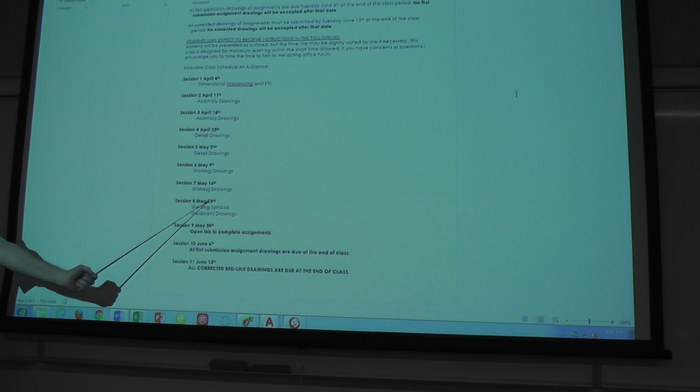We are now here. Session 8, week 8, May 23rd. I'm going to talk about welding symbols and weldment drawings. I'm going to have you do 2 weldment drawings. Chances are you won't get into weldments unless you're in a welding environment.

And basically, we drafters know just enough about welding and symbols and symbology to be dangerous. And the welding people go, drafters don't know anything about welding, which is probably true, unless you've actually done welding. And we do the best we can with the symbols.

Please stop printing, because it's going on tape.

So unless you're in the field, we can basically put a couple welding symbols on there, and a welding person is going to know how they're going to weld anyway. But you need to know at least a little bit about welding symbols, because you never know what's going to turn up in an interview session.

They might ask you, well, have you ever done any kind of welding symbols? And at least you can say yes. You don't have to say not very much, but you can say yes. And you've been exposed to it.

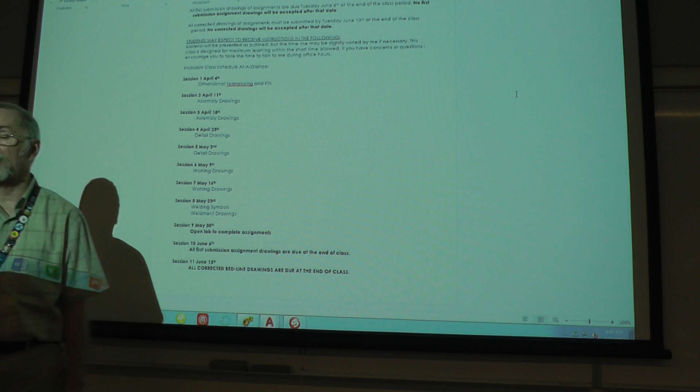Then, next Tuesday is an open lab to complete assignments. You have been given back some red line drawings for trolley assembly and belt tightener, a couple of you. The Tuesday after that, June the 6th, any and all first submission assignment drawings are due at the end of class. So that incorporates some of you, not all of you.

And then the Tuesday after that, June 13th, all corrected red line drawings are due at the end of class. That is it. No drawings will be accepted after that point. Which means you have 4 class sessions or 4 weeks to get everything done. If you get it done before then, you don't have to show up on June 13th. You might not even have to show up on June 6th if you get all your work done. Otherwise, some of you will be keeping me company while I correct drawings.

All right? Questions? Everything's well with the world? Good.

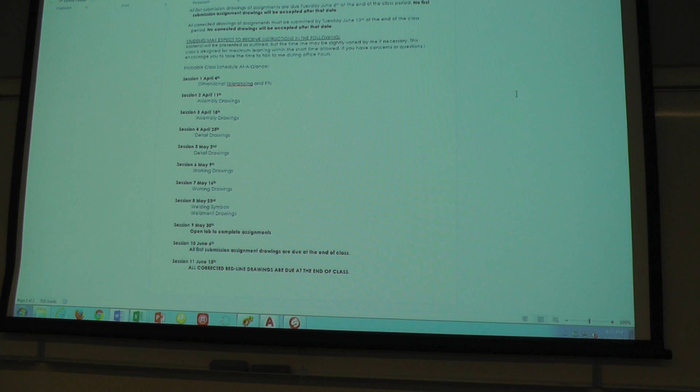All right. In your textbook, which we have not touched much, we've done a couple of the working drawing projects out of there. In the appendix is, let's see, page 673, 674, 675, which is kind of sum and total of the textbook.

Oh, that's good. That's perfectly clear, right? Everybody needs to go to the eye doctor. That wouldn't be as clear. They'll probably bring in a new projector next year after I'm done. And it'll probably be crystal clear, and after all of you are done. That's just the way it works sometimes.

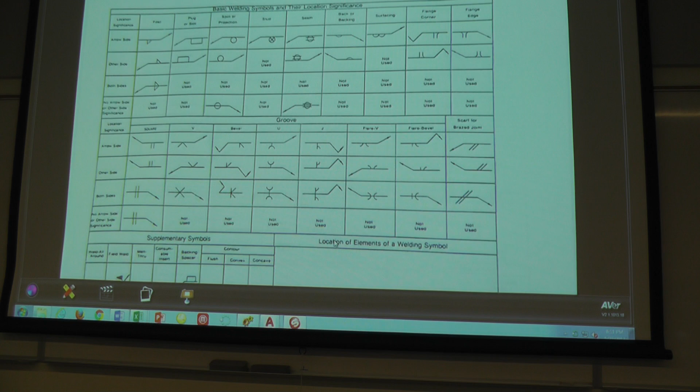There's some basic welding symbols, and that's pretty much what we have to deal with in welding.

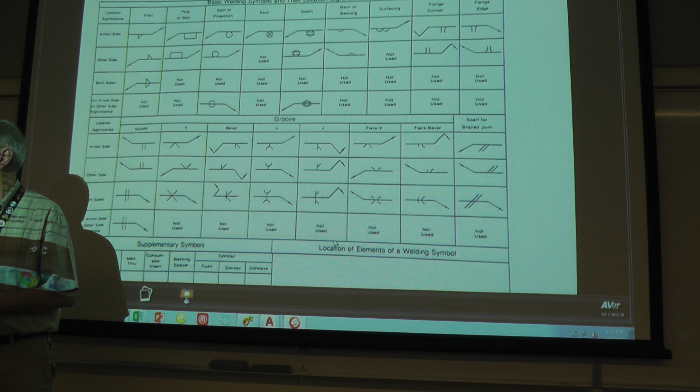If it needs to be accurate, it's welded and then it might be machined after that, or ground, or some other kind of processing is included in it. Just for welding's sake, we don't have to worry too much about that much accuracy in dimensioning. There's spot welds, which are done with a special type of machine. There's studs that are welded, seams, surfacing. There's grinding that can be done to make bevels, to make curves, to take away metal in the joint itself, which is then filled in with filler material.

And there are different types of processes for welding. Arc welding is one, and TIG and MIG and tungsten gas, and a lot of different kinds of processes. But again, if you get in and around that kind of an environment as a drafter, you're going to learn those things. And it's probably going to be a few symbols that are used over and over again. So that's why we're not doing a whole lot with weldment drawings. But there are symbols for square joints and V joints and bevel joints, U joints, J joints, flares, flare and bevels, surfacing, and those kinds of symbology.

The biggest thing about fillet welds is the fact that no matter if the arrow goes to the right or to the left, the orientation of the fillet is always the same. The straight perpendicular line goes up to the welding leader. It's always on the left side. And the angle goes up to the right, no matter what orientation the arrow's going. That's the biggest thing. What most drafters want to do in the classes I've had is flip this around and basically mirror image that if the arrow's pointing this direction, and that would be incorrect.

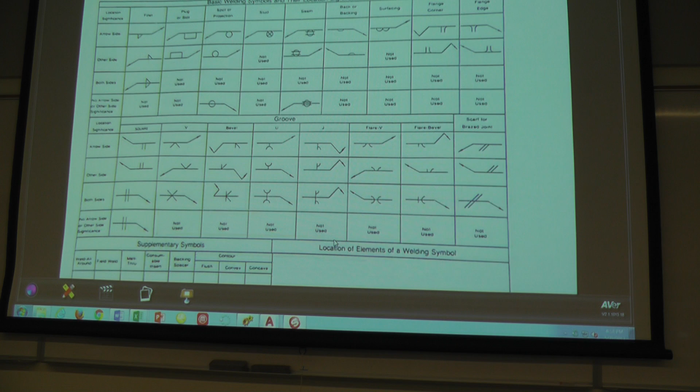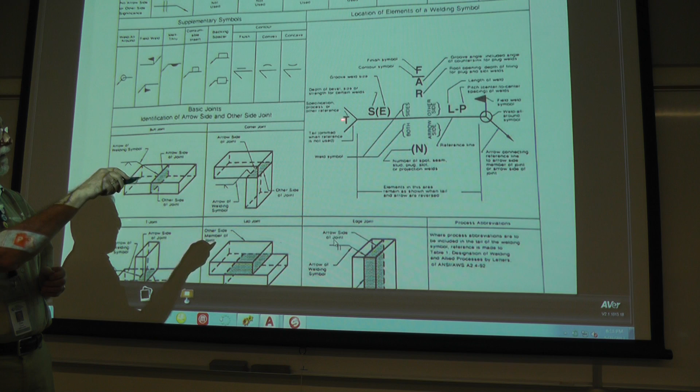If you get really extensive, let's see if I can sneak that in. There might be a lot of information that exists in a welding symbol. For most of the stuff that I've ever done, I've had this horizontal line and then the arrow that goes out here and points to the joint itself. And it might have a little tail on here. The tail can be used for something that says like 2 places or typical. TYP is an abbreviation for typical, which means that that particular weld and size of weld is going to exist pretty much on the entire drawing or at different other places.

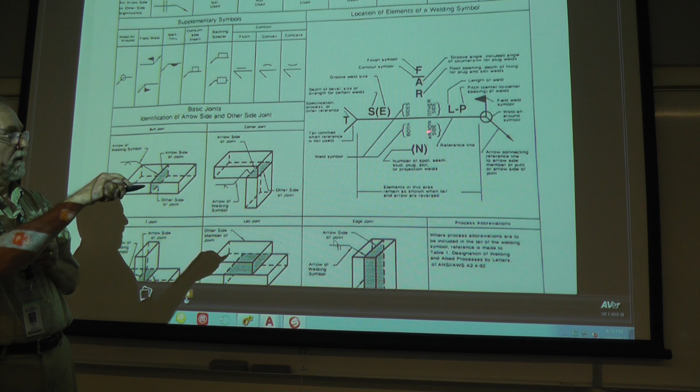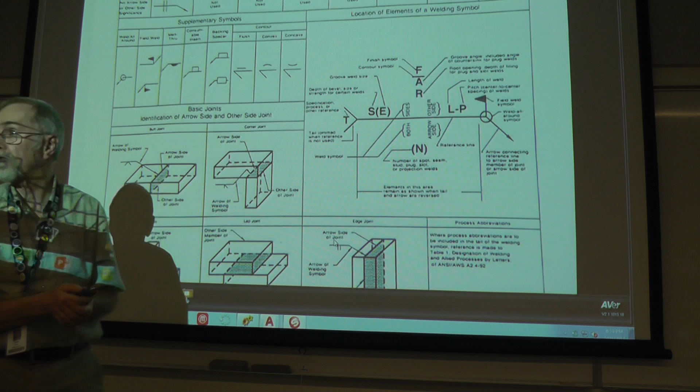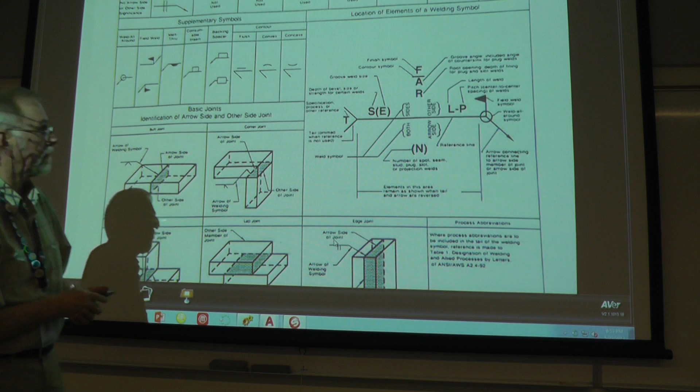You don't really need to worry too much about all this, other than the fact that when the arrow points to a joint and the welding symbol and size are below the horizontal line, that means the weld is applied to the side the arrow points to. It might be just that side, or there could be a joint on this side and another weld on the other side with another piece of metal positioned somewhere. If there's information above the line, that means it's applied to the side opposite the arrow. There's a number of other pieces of information here too. This could be a fillet weld joining those two pieces together.

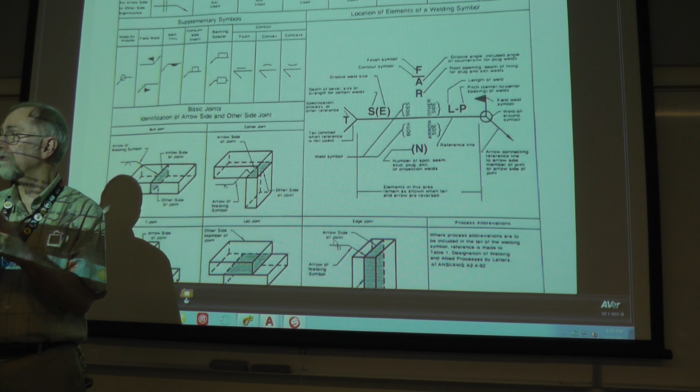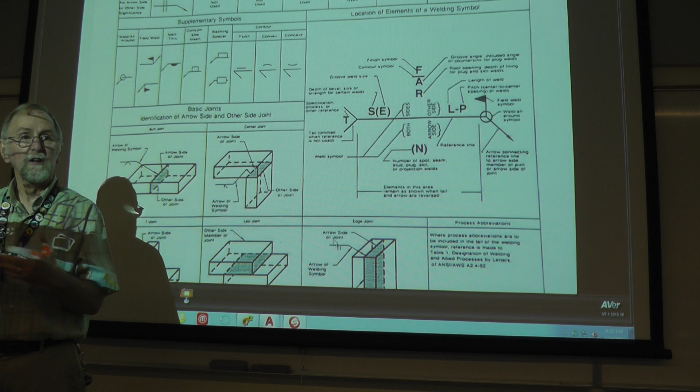I've got a worksheet for all of you to fill out, and we'll go through it together, showing different types of joints and different ways metal is welded together. If it's welded properly, when two pieces of metal joined together are going to fracture or fail, the weld itself should not fracture — it should be the metal on either side of the weld, because the weld heats up that metal, melts everything together, and fills the melted area with filler rod. Welds fail due to imperfections: not done properly, too hot, too cold, or the welder doesn't know what they're doing.

That's on that. If you look at the next page, there's a double fillet welding symbol. Again, the fillet weld is always oriented in this position: the vertical part to the left, the angled part to the right, and the weld size goes to the left no matter which direction the arrow points. The size of the weld is always here.

There might be a weld that is a specific length — it doesn't go the entire length of the joint for one reason or another. If that's the case, a length would be put in here. That's really pretty much all you as an entry-level drafter need to be concerned with. You might run into a welding job, and it's kind of like on-the-job training or learning, because it's a really specialized situation, so chances are you probably won't have to worry that much about it.

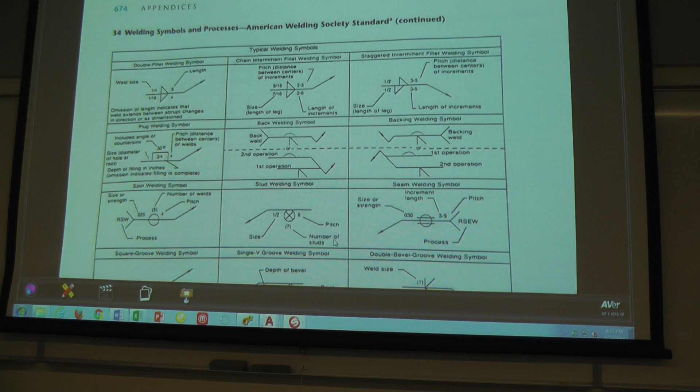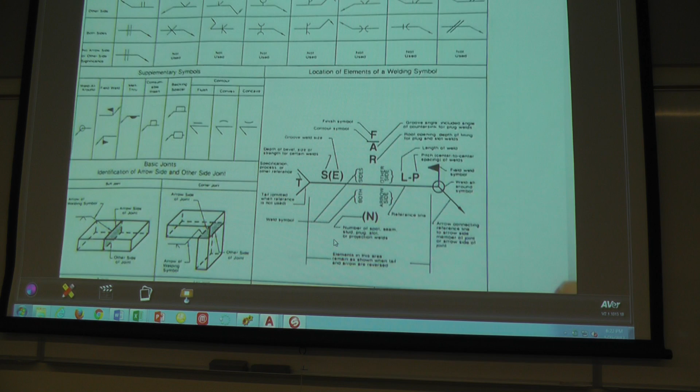Let me drop back to this. Another thing I've run across before is a weld symbol with a level horizontal line and the arrow going out, with a circle around it. That means there's going to be a weld that goes all the way around the particular joint, the pieces of metal being welded together.

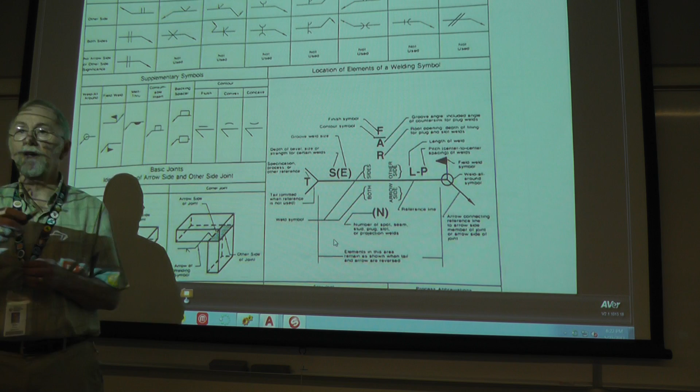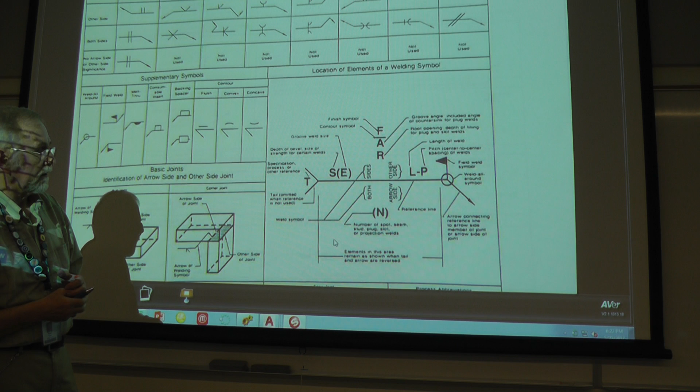A little flag like this that comes out, with a filled-in triangular shape, means that it's going to be welded out in the field as opposed to being welded in the shop. That's probably what you'll run into more than anything else when making a welding drawing.

On page 675 is a chart of all the different kinds of welding processes that exist. I've done a little welding in my lifetime, not much, and it's been years since I did any kind of welding, so I can't even begin to explain what all these processes are, and I'm not even going to try. But you can see there's quite a variety of things that go on in welding — different processes, different ways of welding.

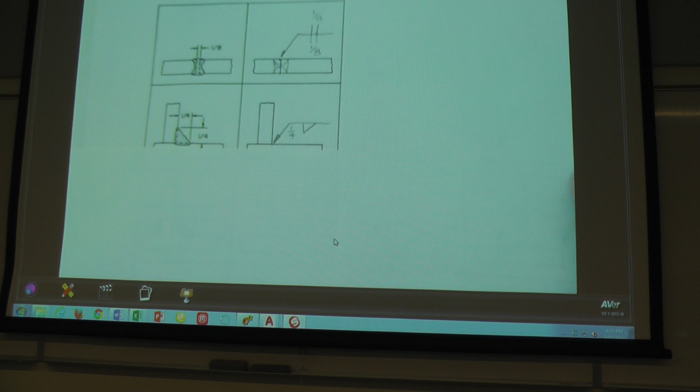All right, the top left. This is a butt weld. Generally the pieces start a little bit separated and held in place, and then the weld is applied. So the symbol for a straight, butted up together kind of joint would be this. You draw a leader out, a 45-degree angle or 60-degree angle possibly, and a horizontal line, and then two straight lines here and here. So you can see the illustration that it's going to be welded on this side, and it's going to be welded on this side.

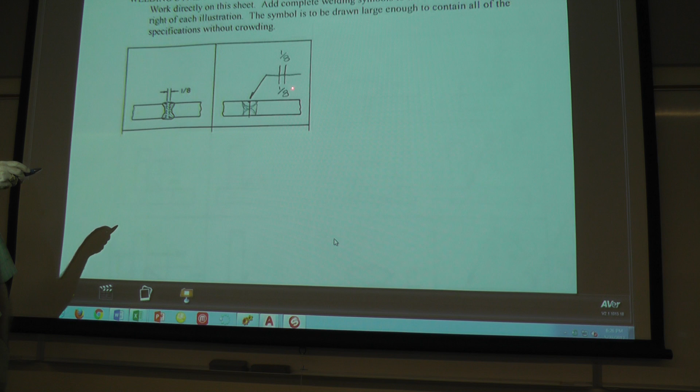So it's welded here, cooled off a little bit, flipped over, and welded on there. And the gap that is supposed to exist is 1/8 of an inch. Gap between the two pieces of metal. And then when this is welded and all filled in, it's like one piece of metal. Again, it's going to fracture out over here somewhere if it's all done properly. So the size, the gap, is put here. That's not the size of the weld. The weld would be determined by the welder. It would have to be by whatever thickness the metal is going to determine what the size of the weld is. And that's all I need. It's 1/8 of an inch here.

So this means that it's welded on the arrow side of the symbol, and this symbol and number that's up here means that it is welded on the opposite side of where the symbol is. And that's the meaning of those two, the significance of that.

So is the arrow like a full arrow, or is it just a half arrow? It should be a full arrowhead. Okay, just making sure. This is probably one I filled out in class, and I didn't want to fill it out again, so I'm just holding it out.

Fair enough. Should we write 1/8 above? 1/8. Yep, can be just like that. So again, the symbol on the side the arrow is pointing means it's an 1/8 inch gap on it. Yeah, that means there's an 1/8 inch gap, this means there's an 1/8 inch gap.

Well, if it's a butt weld, it's gonna be on both sides. Now, it might be that for some reason it's only welded up here. So the symbol means that this would be on this side of the welding symbol only. But if it's a butt weld, it would usually be welded on both sides. All right, let's slide over to the next one.

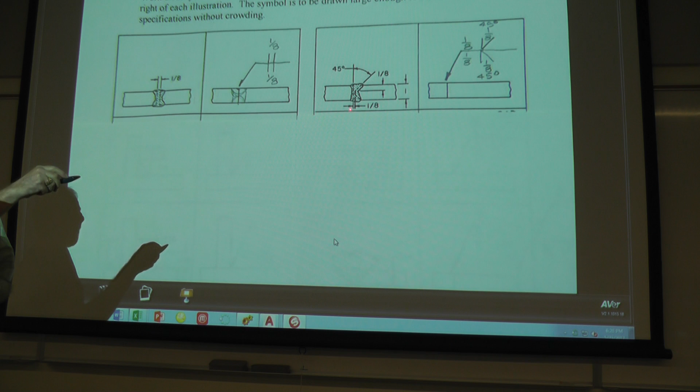This one is a straight piece right here, and then this piece and this piece have a 45-degree angle ground on them. It's one inch thick. The information is that this penetration needs to be 1/8 of an inch, and the 45-degree angle is gonna go down about 1/8 of an inch on both sides, which is 1/4. So there's quite a bit of material left here, and there's an 1/8 inch gap right in here and a 45-degree angle. So the symbol for that is gonna be, here's the size of the weld, penetrating down 1/8 of an inch on the arrow side and on the side over here. So that's been ground out.

This 1/8 of an inch is for the gap that exists. A 45-degree designation at the top. So gap of 1/8 an inch, 45-degree angle on the grinding of it, and 1/8 of an inch penetration on the weld itself. So if you add those numbers up, if it's one inch thick and it's 1/8 inch penetration and 1/8 inch penetration, it's not gonna go all the way through. Which would surprise me to some degree. But that's the information we have to work with, and that would be the welding symbol.

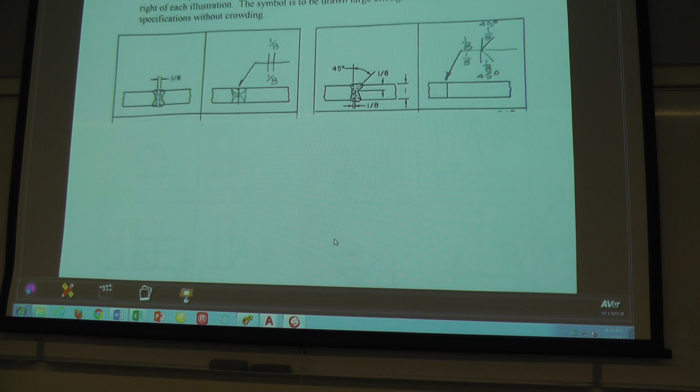Next one down is a fillet weld. Generally pieces that are at right angles to each other. This one says that it's gonna be a 1/4 inch weld and a 1/4 inch weld, so it's gonna be symmetrical. The only symbol that is necessary on that is to go here with a fillet weld. Notice the orientation, the vertical part to the left, this going up to the right, and the size of the weld is 1/4. What this means is that this weld is applied to this side of the symbol, which means it's only welded on this side of the two pieces. There's nothing over here on this side.

So is the idea that the flat side is facing towards where you're gonna weld, or is it the curved side? This side right here? No, that's just where the orientation is. It's not necessarily relating to how the weld looks.

The weld was on the other side, right there. If the weld thing was still going out this other way, the flat side would still be on the left side. It's always on the left side.

Gotcha, but they would be facing upward. Yeah, it would be facing upward. If it was on the other side, it'd be facing up? If it's on the other side, and since I don't need this ever again...

If this had a weld over here, that's what you're asking, right? The symbol would be this.

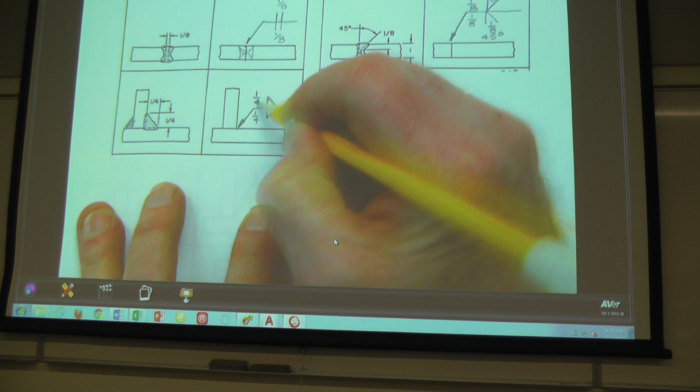Okay, so on top means on the left and on the bottom means on the right? No, on the bottom means it's on the arrow side of the symbol.

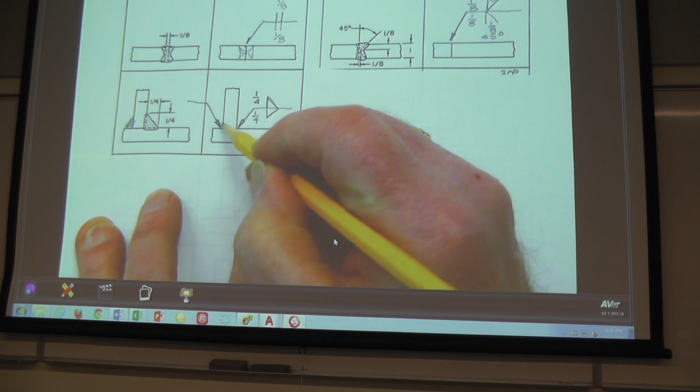Because I could put a welding symbol over here instead of over here, if I had enough space. So if I put a welding symbol here, and if it was welded on this side right here, then the symbol would look like this. And I'd put 1/4 of an inch in.

Okay, so you put it underneath if it's on the same side as the arrow. If it's on the opposite side of the arrow, you put it above. Correct. Okay, gotcha. All right, this one here is...

Has an angled ground on it of 30 degrees and a 1/2 inch fillet weld on this side. This weld goes in 3/4 of an inch, so that's the size of the weld.

So one welding symbol can be placed out here, and a line that goes - that's a horizontal line in case you didn't realize that. So the fillet weld is on this side, which means that the fillet weld is on the arrow side of the symbol, which is going to take into account this fillet weld right here.

And the size of it is 1/2 inch. On the opposite side over here, we're going to grind this out to kind of create a fillet in there, but the symbol is this, which means it's ground out at a 30-degree angle, and the penetration size of the weld is 3/4 of an inch, which means it's going to come in 3/4, 30-degree angle that's grounded.

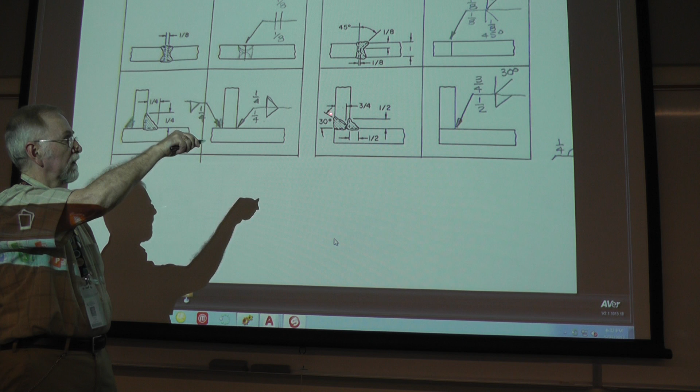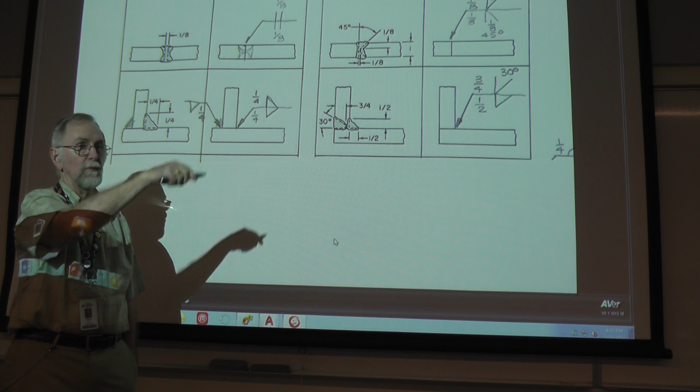So it's not a fillet weld because this is flat across here. But to get the penetration that's needed to make this strong enough for whatever the design is, we're going to grind out part of this. And again, it's ground in this direction, but the flat side of the welding symbols are always to the left. It has no relationship to pointing to the weld and orientation of what the weld is itself.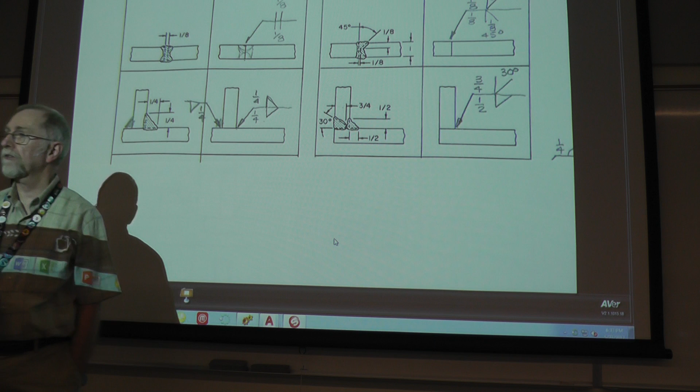To get off topic, but I've seen different versions of how the fraction is written, either at an angle. Which is preferable? Which do you prefer? Whatever's easiest to put in as text. Because it's mixed and matched on mine, but I didn't know if you had a preference or what.

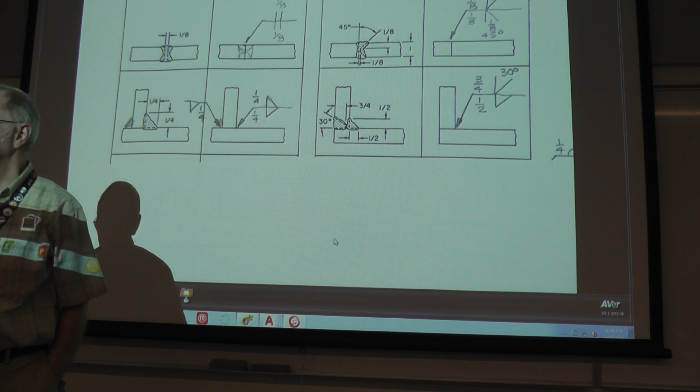No, it could go either way, quite frankly. It could go vertical like this, or it could be more not stacked. Again, welders aren't too particularly fussy about how the fractions show up. They just need that basic information.

All right, next one down has 2 fillet welds that happen to have some different sizes to it. This one is a fillet weld that's 1/4 inch. This one is a fillet weld that is going to be 3/8 of an inch in this direction horizontally and 1/4 of an inch in this direction vertically.

So again, I'm going to put out the symbol, horizontal line, fillet weld, flat side to the left, angled up at a 45-degree angle, 1/4 by 3/8 and 1/4 inch.

Brent, kind of to answer your question, I probably put them more vertical because of space limitation, more than anything else, because I was filling these out as we were going. This means that this weld is on the arrow side, 3/8 by 1/4, and on the opposite side, away from the arrow, is the 1/4 inch.

Nick? You know, if you've got the two different measurements, like the 1/4 by the 3/8, the first 1/4, does it mean specifically it's only going up 1/4, or can people flip flop that? I think, I'm not sure, to tell you the truth. You're gonna ask. Yeah, they seem particular. There might be a particular method in that, but I'm not aware of it, I guess at this point.

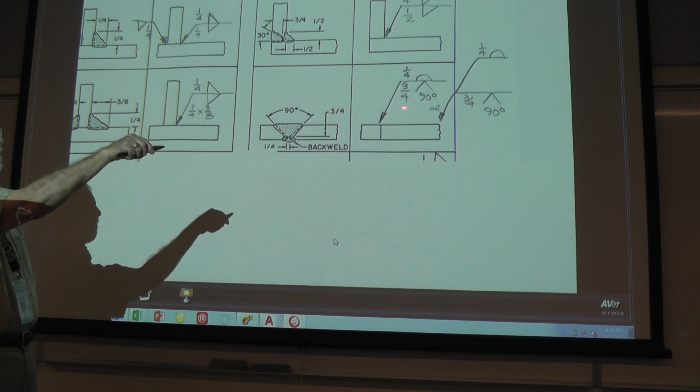So this is one way that I can do it. I can run the leader up and the horizontal line, and then this means that this information of the weld is applying to the arrow side of the welding symbol, the angle, that it's a V, and the size, which would be the penetration in here, 3/4 of an inch. And then this is a symbol, kind of like a little half circle up here for a backweld, and a 1/4 inch. It can be done in this manner, or as an alternative, it can be done looking something like this. Now, this arrowhead would be in this position right here, but I had to move it over, okay?

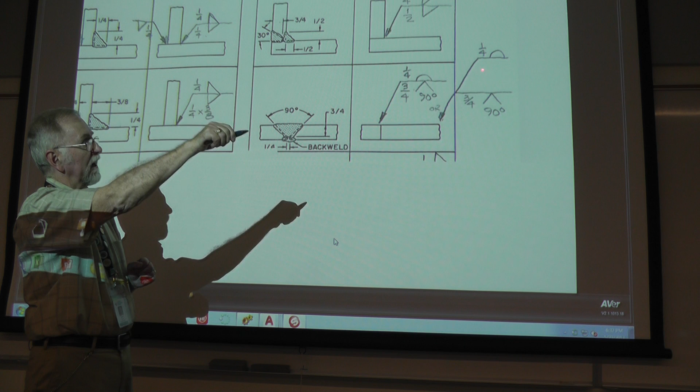So again, my angled, my ground out angled piece, 90 degrees and 3/4 of an inch. And then I could extend this on further, maybe not quite so high, maybe out in here somewhere, and put in then the backweld symbol, 1/4 inch, so it's above the horizontal line, which means that it is being applied to this side of the weld joint over here.

Any welders in here? Am I doing okay so far? Oh, good. Let me know if it's wrong.

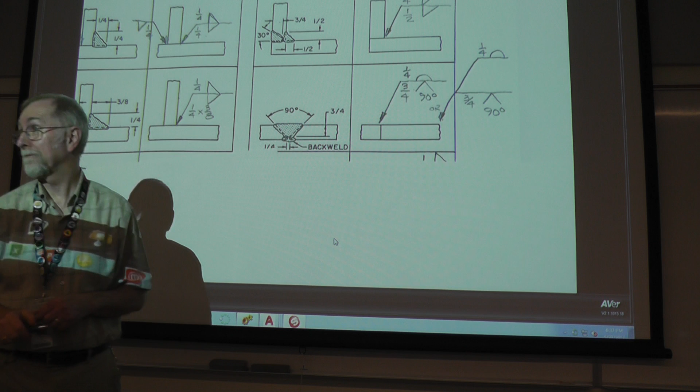No, you're doing fine. Okay, I want to make sure that I'm getting it right, so maybe to answer Nick's question, does it matter on here? It doesn't really matter. It doesn't matter what you... there's probably some other notation in there if it's really critical, I suppose. Well, the whole thing is that you basically can tell, like, when you're building it, which side gets the thicker part of the weld than the other. Right, okay. Welders' discretion. Well, good, we're doing especially great. The metal thickness too. All right, right. Let's slide back here. The thinner metal will be thicker... the thinner leg will be the thinner side of the...

Where are we at? Okay, here we are. All right, 1/4 inch fillet weld here, 1/4 by 1/4, 3/8 by 3/8. Leader, horizontal line, fillet weld, 3/8 and 1/4. The 3/8 is applied to the arrow side, 1/4 inch is applied to the opposite side of the weld.

Oh, I opened up the other one too. And another fillet weld. Let's see, what did I do here? So 1 inch and 1 inch, 1 inch, 1 inch, and a penetration of 3/8 of an inch here. So for the arrow side, we've got a fillet weld symbol here, and the 1 inch, which covers this size.

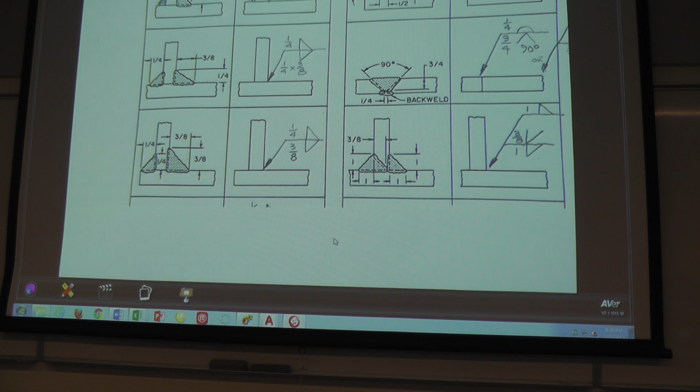All right, last two. Are we gonna make it? All right, so we've got an overlap joint that's 3/8 of an inch plate on top of 1/2 inch plate.

Now, I've always said that kind of the rule of thumb, Sasha can back me up on this one or not, because you did the welding program, right? I did. Yeah, so she's qualified.

Okay, rule of thumb: if you don't know what size the weld is supposed to be, you'd go with the thickness of the thinnest material, because you don't want to penetrate further than that. So we've got 3/8 over a 1/2 an inch, and I got a fillet weld that's going into the 3/8 and the 1/2 inch material. So I'm going to use the thinner material thickness as the size of the weld if I am not told, or if I don't really know what it is. Which means, now, here's another thing.

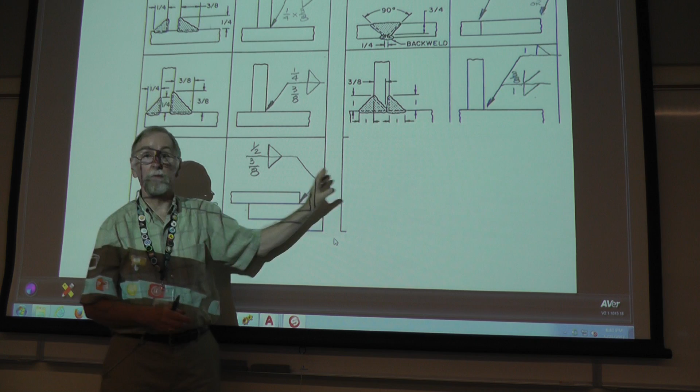I don't have enough room over here. Something else is going on drawing wise. I can start bending the leaders to get to where I need to go. They don't always have to go in this direction or in that direction with just a straight line. I've made some interesting little jogs in my welding symbols sometimes to accommodate what I need to do. So here, it's coming down here.

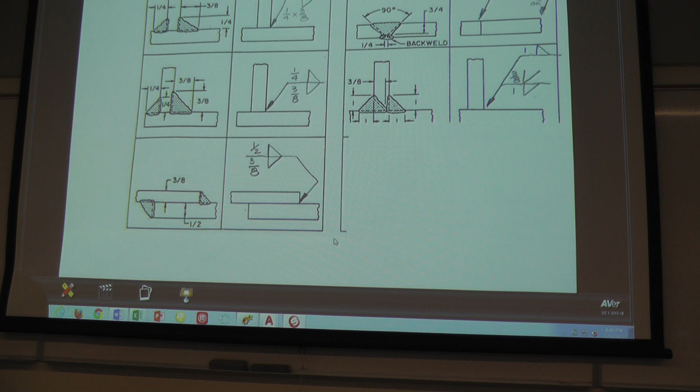This is the arrow side, which makes the fillet weld 3/8 of an inch here. And then on the opposite side of where the arrow is pointing, as a fillet weld, it's 1/2 an inch because... will that be true? Or would I need 3/8 on that one too? Because it's going up into the 3/8. No, because it's 1/2 an inch for here. It's only going to penetrate. It's because it's thick. It's 1/2 an inch this way and this way. It's not going to penetrate that far.

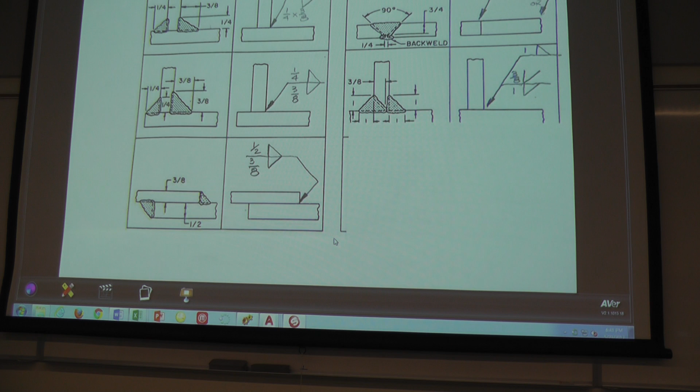And a surface buildup. A piece of equipment's worn down, we want to put more surface area on it and then machine it back to make it a certain diameter potentially. So we're going to build up this surface an eighth of an inch thick. On the arrow side, we say 1/8 of an inch, and this is a symbol for buildup. And then this right here indicates that it's going to be all the way around the whole diameter, to build that surface up.

A lot of those are going to cover any kind of situation that you're probably going to run into, unless it's more specialized, like maybe you end up working at Vigor or Oregon Iron Works or something that does a lot of welding. I feel like finishing marks are harder to understand than welding symbols. What is, finishing? Oh, finished surface marks? Surface marks, yeah, those are the harder ones.

Sam, would there be an instance where you would use the all-the-way-around symbol if you're butting up two pieces of like 1-inch steel, where you'd go all the way around the two bar steels? Or is it only on circular pieces? No, it's not necessarily on circular pieces. It could be two pieces that are perpendicular, and one piece is a little smaller than the base, so you might have a horizontal base and a vertical piece that's inset a half an inch or something. For the purposes of the design, you might want to weld all the way around all four sides. You don't want to put four different welding symbols on there, because it's going to be the same size fillet weld, more than likely, and you just want to say that size goes all the way around. If it goes out flush to the ends, you're just going to do two sides. In a flat piece, I don't see that there would be an all-around on that necessarily, not unless it's some obscure thing.

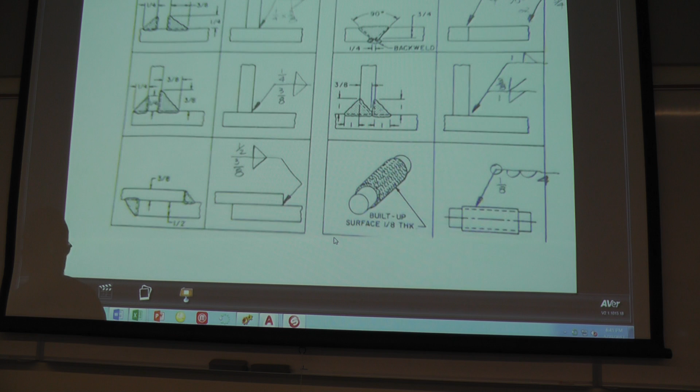Yeah, so, all right. Now, just for the fun of it, here's some interesting alternative weld symbols. Unofficial weld symbols.

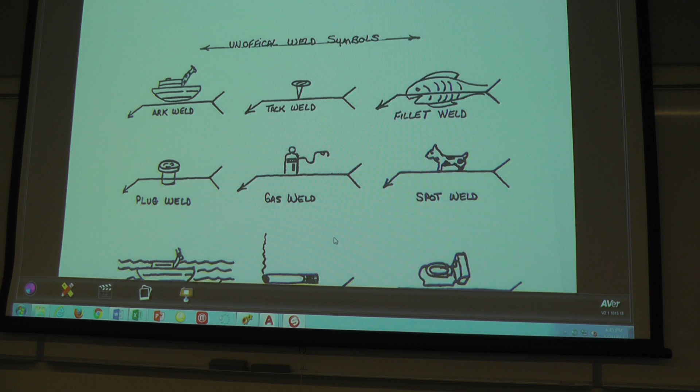Arc welding is a process, so there's a symbol for an arc weld. A tack weld is to hold something temporarily together, so you'll probably want one of these, a tack weld. A fillet weld, well, in this case would be pronounced fillet weld, so that's our fillet. A plug weld has a plug. A gas weld has a little gas cylinder. Spot weld has spots sitting up there. Spot welding is usually, again, kind of to hold things together but not do a whole lot. Spot welding a lot of times is thin material, like sheet metal.

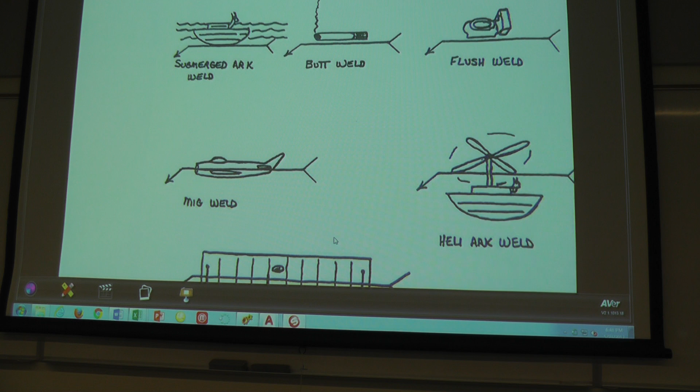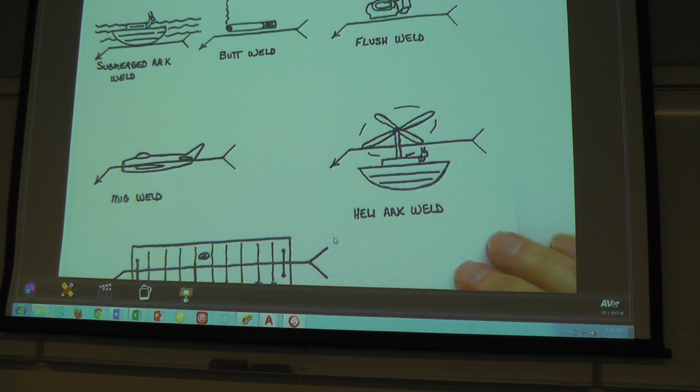Submerged arc welding symbol, I like the little gif. Yeah, butt weld and flush weld. Flush welds are usually ground down so that they're flush. MIG weld, that's another process, so you can recognize the Russian MiG jet there. Heli arc weld, propeller. And then anything that's welded out in the field gets a field weld.

So those are the unofficial alternative welding symbols. Well done, well done. Universally understood, some of the time they use it. Pictorial, I guess. Pictorial. Yeah.

All right, ready? Drum roll, last project. Yeehaw. Just two drawings. One, two, three, four. Yeah, that always gets a chuckle.

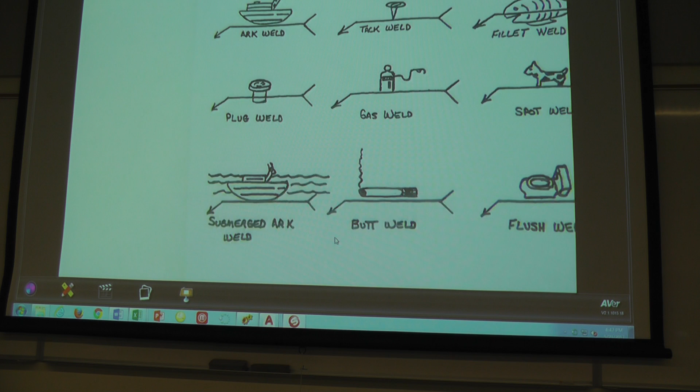Oh yeah, since I've got a fair amount of students here, and the question kind of came up. A certificate is what you're going to receive when you complete all your courses successfully. You do not actually get a suitable-for-framing piece of paper. And I only found that out recently, because I thought you did, but then I've never gotten a certificate from PCC, so how would I know? I just teach, and assume that you're getting a piece of paper.

They only send you something suitable for framing if you get a 2-year degree. Sorry. And even a 1-year certificate, you wouldn't get a piece of paper. It's officially recorded in your transcript, somehow, some way. I have no idea how that shows up, but it will show up. And on a resume, you would say that you have completed the CAD certificate, computer-aided design drafting certificate, and if they wanted proof of that, I guess you'd have to submit them a copy of your transcript.

So since you took the advanced AutoCAD out and we were able to take the digital design and 3D printing, that hasn't actually shown up on the transcript that it's passed? It will. Okay, it will. Because I have submitted the paperwork necessary for that to the evaluator. And he's emailed me back that he's applied the substitution. I just haven't opened up that particular email to make sure that it's gotten applied to everybody that it needs to get applied to.

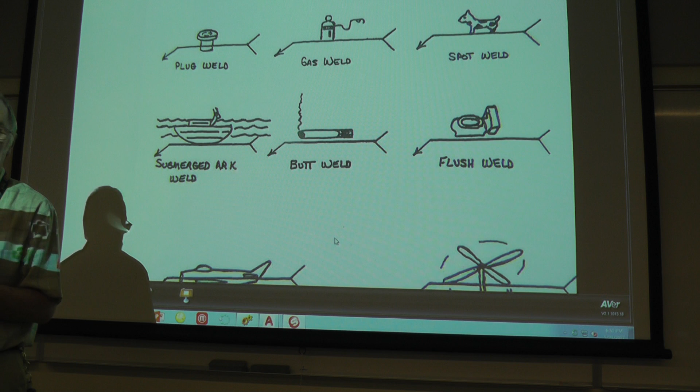So, I got the email that was like, go order your diploma or certificate or whatever. But according to what the evaluator said, you don't actually get it. So I don't know. I think it's just a generic email that goes out for somebody who's completing degrees or certificates, but his statement was you don't actually get a piece of paper. Okay. I digress a little bit.

If you wanted a hard copy, you probably have to pay for something. Yeah, when you get transcripts, if you want an official transcript, yeah. I'm not sure companies would really care. Yeah, a lot of them just take unofficial ones. Or they just take your word for it. Yeah, or you hang it on the wall if you buy it. That's just like pulling hairs, really.

Weld joints are to be 100% full-strength fillet welds. Please put that on your drawing, so I don't have to put the red line. 100% what? It's the second sentence in here. Well, actually, third. Yeah. Third sentence. Show all necessary dimensions as to location of features and position of pieces that are put together. I will explain that a little further. And proper weld symbols. Include any appropriate notes.

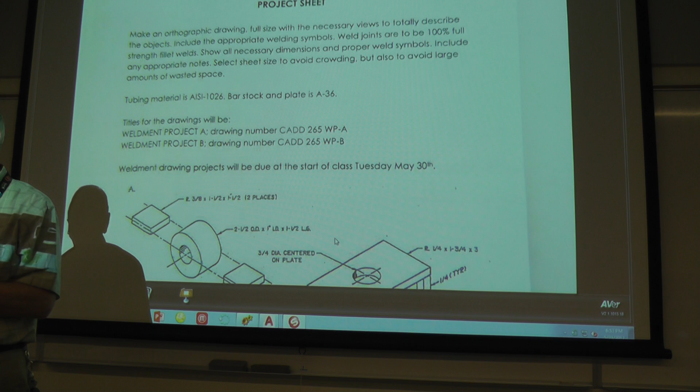Now, you're the drafter, and there's a certain amount of things that they'd kind of like for you to be able to figure out, even as an entry-level drafter, in figuring out what the proper sheet size should be to avoid crowding, but also to avoid large amounts of wasted space. This is 1-to-1. We're not going to scale it, so consider that in your proper views, necessary dimensions, notes, and all that kind of stuff.

All right. If there's tubing material, which there isn't, it would be AISI 1026. Bar stock and plate is A36. That's not tubing. That's a piece of solid stock that's been drilled out. Okay, I'm just saying. So that's going to be A36.

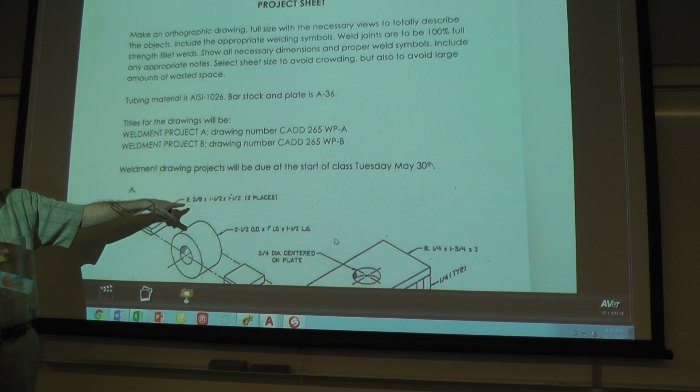All right, there's an ambiguous little symbol here that's really hard to read on your paper, and also right here. It's a P with an L through it, which is a drafting abbreviation for plate, which is the A36. Where's my marker? Covered it all up. All right, it looks like this. Oh, that thing. Letter P with an L in it.

You can do that with two single line text commands. Single line text, P. Single line text, L. And move it so that it positions itself, okay? It's not that hard. What does that mean? Plate. It's drafting abbreviation for plate, because I don't want to have to spell it all out.

It dates back to hand lettering. I don't want to letter out P-L-A-T-E when I can go P-L, just like I did there. So I'm doing it by AutoCAD. Two single line text will take care of it. Once I have that there, I can copy it, or I can make a block out of it and put it on another drawing, or use it for later referencing.

All right, the title, Weldment Project A, the drawing number CADD 265 WP-A, Weldment Project A. Weldment Project B, drawing number CADD 265 WP-B. Due at the start of class on Tuesday, May 30th. That's next week.

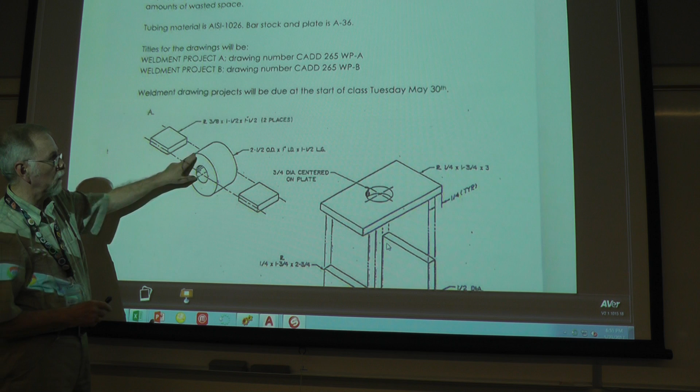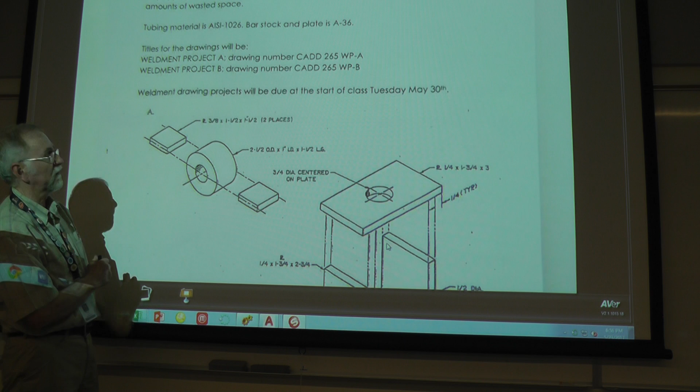This is 2.5 inches OD, outside diameter, by 1 inch long. Oh, excuse me, 1 inch. I can't even read. 1 inch ID by 1.5 inches long. This is plate 3/8 of an inch. The first dimension is the thickness. Second dimension is the width. Third dimension is the length. 3/8. This is simple enough that you could put this on as leaders.

This means that all of this is symmetrical along this center line. And it would be best if you did a front view and a top view, so that we get the correct orientation. And you want them to be kind of exploded views, or whatever you call it? No, I want them to be connected, joined together, next to each other. This is only exploded as an illustration of how these things go together, that they're separate pieces. Okay. So you want the two plates to be tangent to the circle, basically. Correct. Gotcha. And then a fillet weld.

And I might even sketch it up here for you, just to help you. I mean, I'm such a nice guy. All right, that's one drawing.

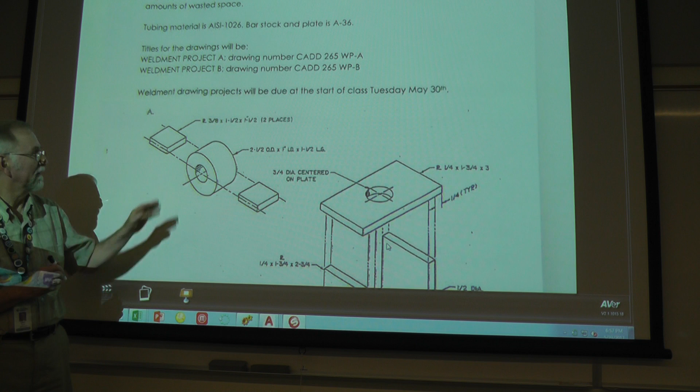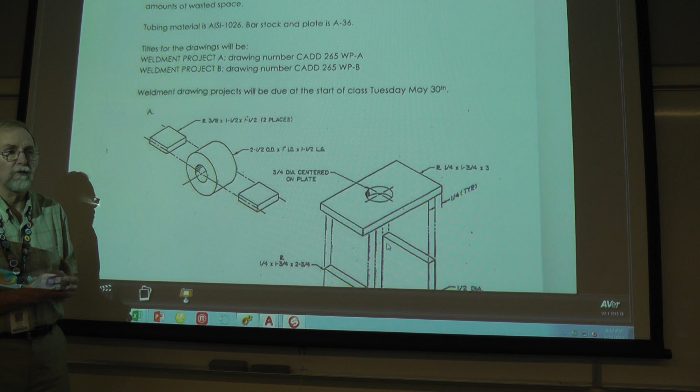You doing it in AutoCAD? I would, personally, but if you want to use SolidWorks or Inventor and create a solid model and then make a drawing of it and use the welding symbols that exist in there, that's fine. I don't care the process, I just care the end result, the print. The dimension on that is plate 3/8? Yes, this is PL for plate, then 3/8, which is the thickness, by the fact that it's 1.5 by 1.5 square.

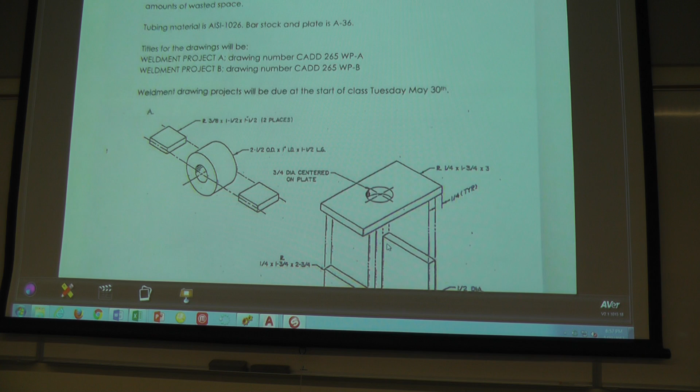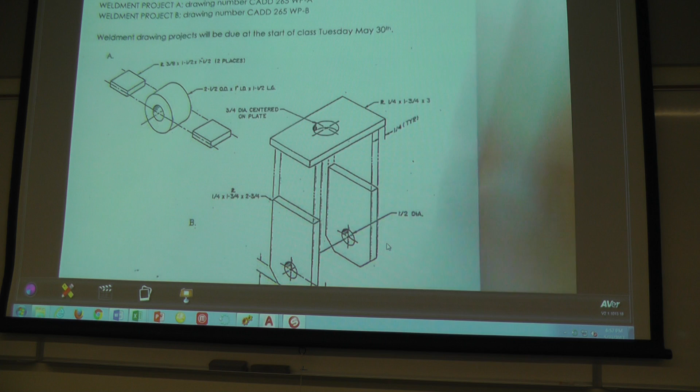Okay, the other one, so this is A, obviously, because there's an A up here, and this is B down here. Do I have it all on here? PL quarter, which is the thickness, by 1 3/4, which is the width, by 3, which is the length. On this one, I want you to dimension the size of it, not use a leader to show the dimension. And this note right here is for information purposes. 3/4 inch diameter centered on the plate.

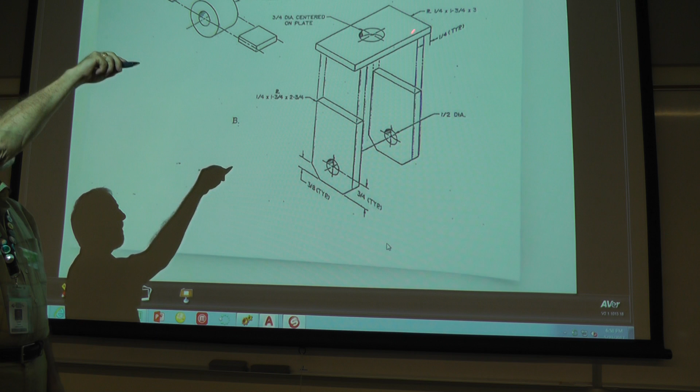Do not use this note to locate this; that is inaccurate and assumes that people actually know where the center of the plate is. Location wise, you should put in a dimension from one edge to the center of the hole and from one edge to the center of the hole, which means you're going to have a top view, which means you're going to have some hidden lines.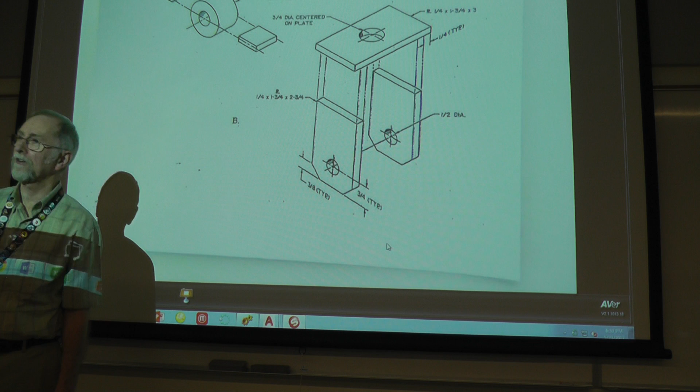This is also plate, that's the PL, 1/4 inch thickness, 1 3/4 width, 2 3/4 length, a 3/8 inch chamfer on here. Dimension the location of the hole, both from the bottom and from an edge. Don't make the assumption that people think that that's in the middle. Dimension it and take away all doubt and controversy that it gets skewed over somewhere. This line right here means that these two holes are in line.

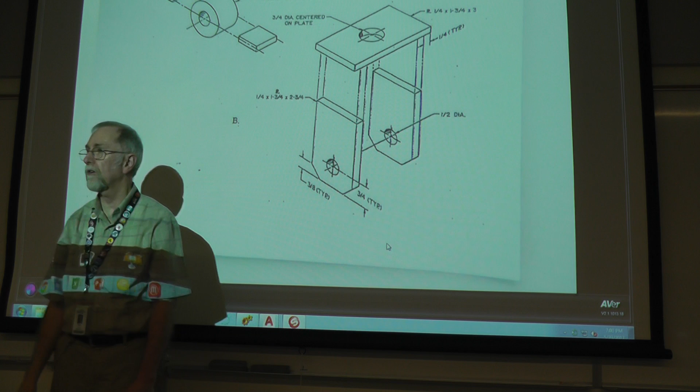You could, with your diameter of this hole right here, which is a 1/2 inch diameter, do a diameter dimension off of there, and you could say 1/2 inch diameter, 2 places in line would suffice to show that this is not any difference. So once you have this dimension on here, then that would go to that. I would suggest front view, look in this direction, top view, and then a right side view to get the required dimensioning in there.

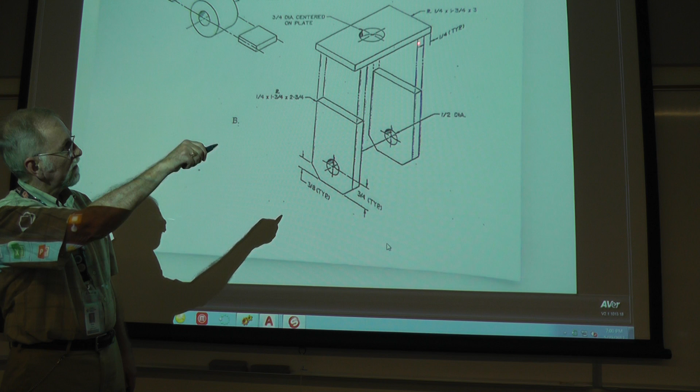This plate is inset 1/4 inch. There would be a fillet weld on this side and a fillet weld on this side. Now, you could put one welding symbol over here with a fillet weld and a fillet weld, and then put the little angle out here and say typical, or say 2 places. All right. Any questions with that? Yes, Kevin. First drawing, you want fillet welds on both sides? Yes. Top and bottom, yeah.

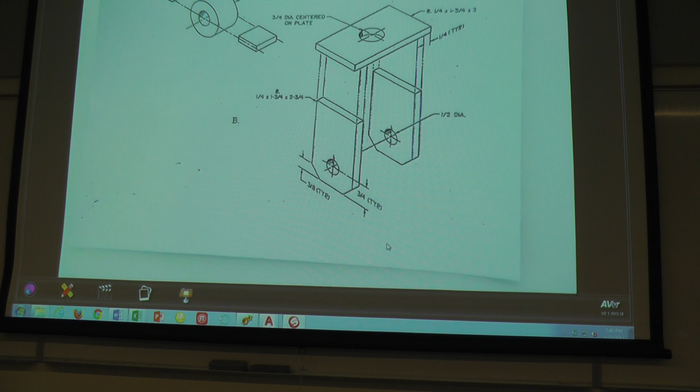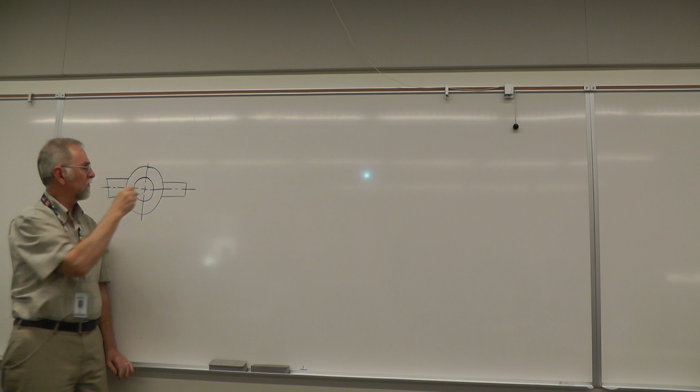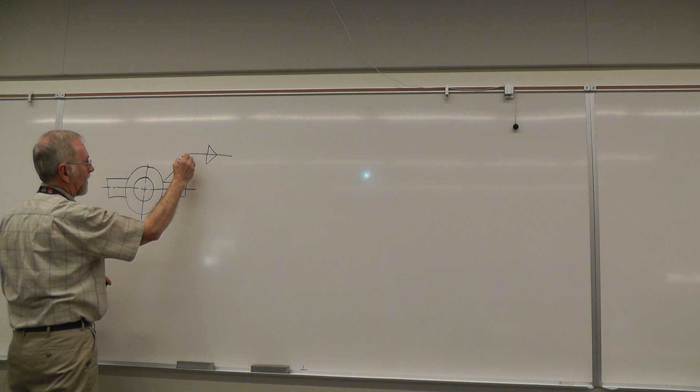Now I think, as I recall, if you use SolidWorks or Inventor, it actually puts in a funky little welding thing in here. Maybe that's why I don't like it, because if you were just doing AutoCAD, you wouldn't put anything in there to indicate that that's a weld. So you can do this for the welding symbol. What was the thickness? Okay, so what I might do is actually horizontal like that with single line text. And then you could say this.

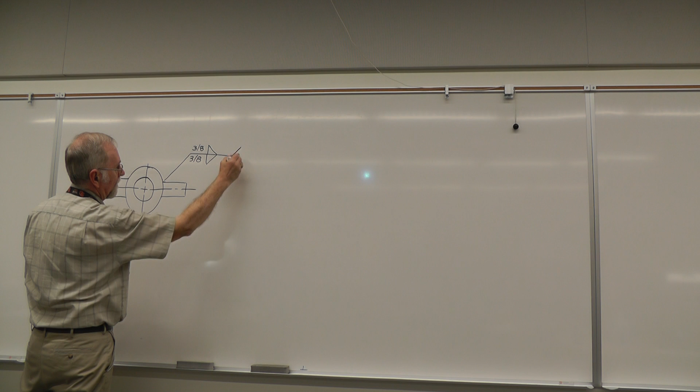PLCS, places. Oh, let's not forget the arrowhead here. That means there's gonna be a fillet weld here, and here, and here, and here. And because this is all symmetrical and it's got definition of the size, you could do a leader to say what the size of this is, and a leader to say what the size of this is, and then you're gonna include your top view. There really is no dimensioning involved in this. This is supposed to be all along the center line here.

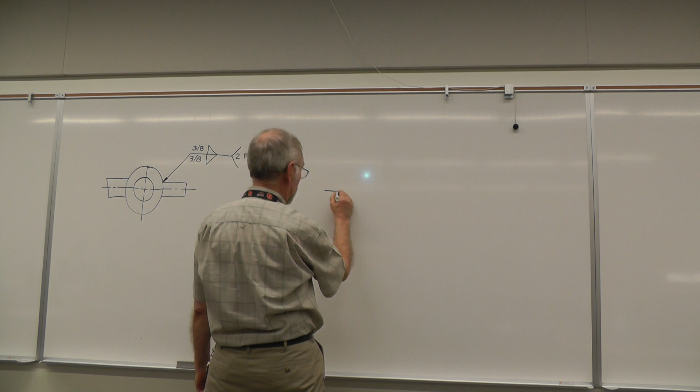Then the other one, let me just do the front view here, maybe. Something like this. Don't forget that it's got a line in there for your chamfer. Where's that hole going? Above the chamfer? Yeah, I think it's above the chamfer. Don't forget your hidden lines. You might have to change your line type scale to get it in there. Don't forget your center lines. Oops, I got it out of proportion here. And there's a hole up here. Don't forget your center lines.

Alright, so you're gonna make sure that you're gonna dimension this. This is one of those rare occasions when we have to put a dimension on the face of the object. And we could say quarter. Yeah, let's do it this way. I could either say typical or two places, which means it's here and here. So if I do that, then that leaves me room to put my welding symbol out here. Is that correct? Yes. Quarter.

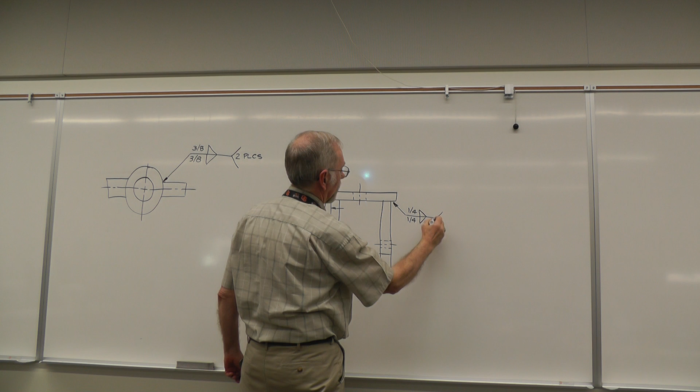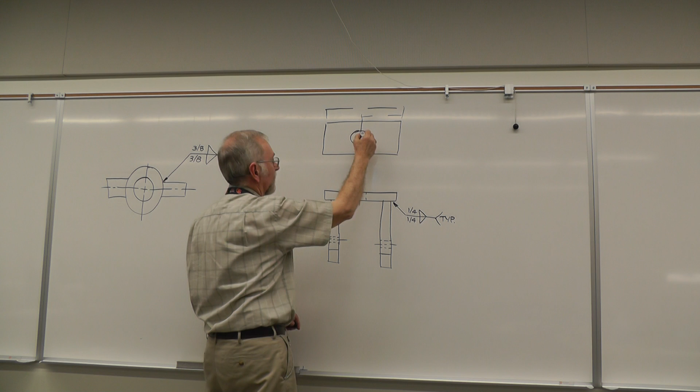Typical or two places works. Either one. So we could do typical on the other one too, instead of over here? Right, yeah, you could put that, or you could say typical. Two places works. Right, then a top view and a right side view to get your dimensioning, size, and location. Okey-dokey then. And over here. Don't use the generalized note centered on the plate. That's it.

Sorry to have such an extensively huge project for your final one. You got some work to do for making red line corrections anyway and getting that trolley wheel assembly thing done. A couple of you still have other things to do.

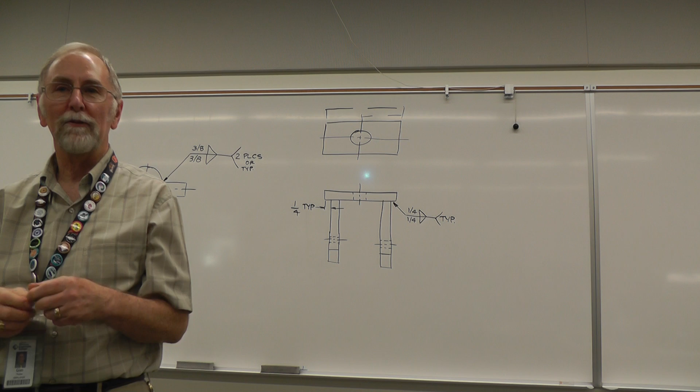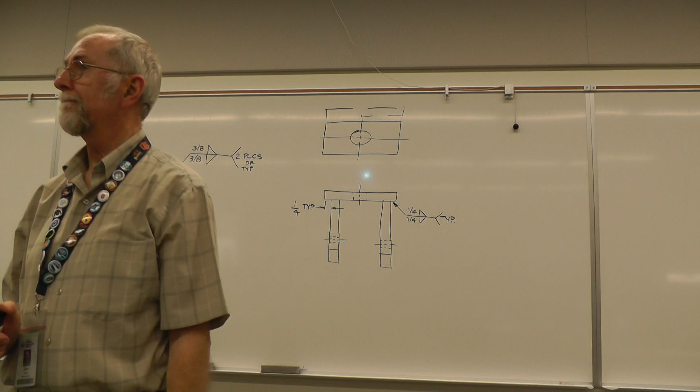Question, Abraham? Do we need a side view for that? A side view? Over here? Yes, you would want a right side view as well because you need to dimension the location of this hole right here in the vertical pieces. Yes. Correct. All right. Ready, set, draw. Get your work done. Finish up.